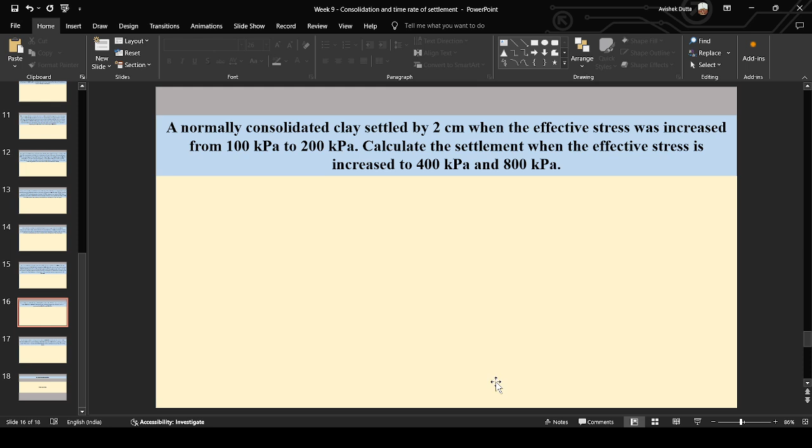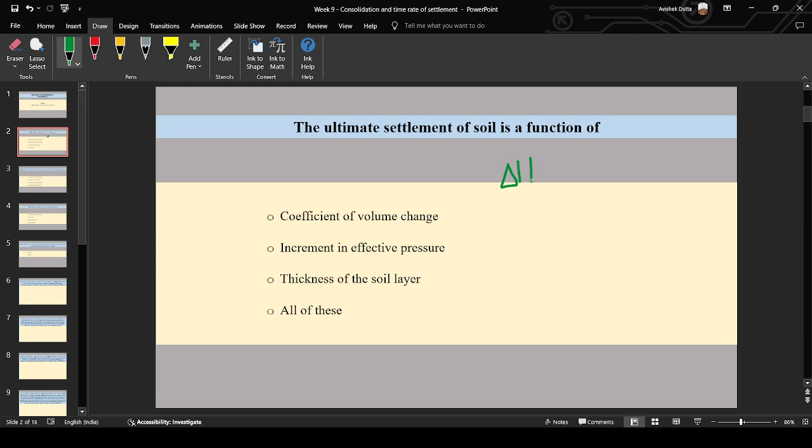So the first question was: the ultimate settlement of soil is a function of. Any answer? Okay, looks like some of you have left the meeting. I'll just straight away discuss the solutions. Ultimate settlement of soil is a function of the formula for ultimate settlement. If del H F means the final settlement, the formula is the product of MV, the coefficient of volume change, then increment in effective pressure, and the initial thickness of the soil layer. So it is a function of all these three: coefficient of volume change, increment in effective pressure, and thickness of the soil layer. So the fourth option, all of these, is the right option.

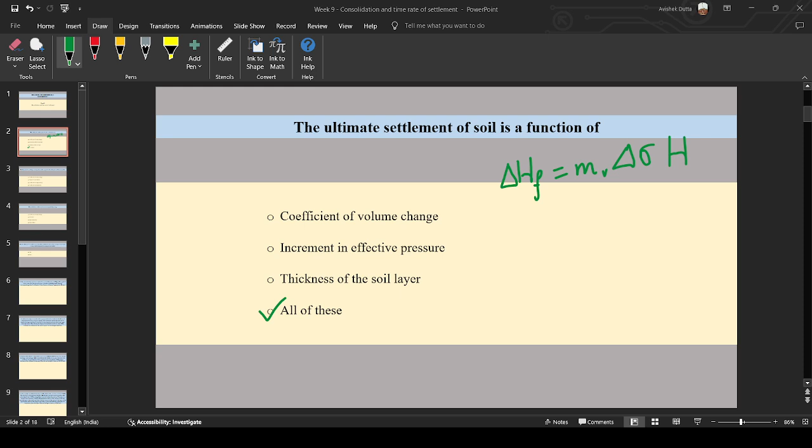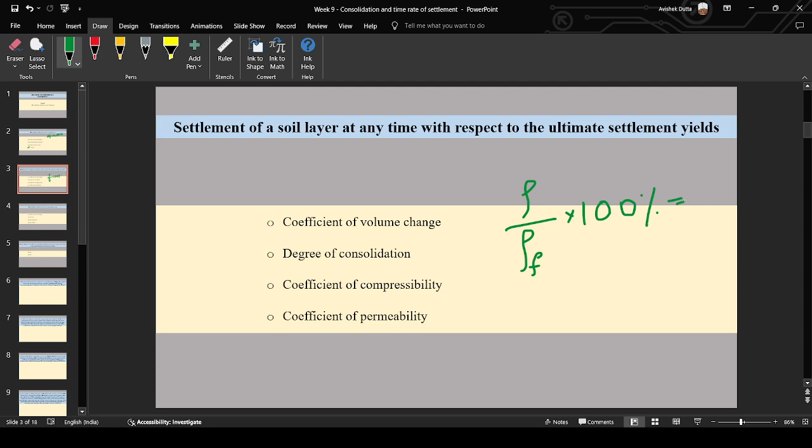Next question. Settlement of a soil layer at any time with respect to the ultimate settlement yields what? If settlement is rho, and ultimate settlement is rho f, and we describe this as a percentage, then this value we get is U, the degree of consolidation. So settlement of a soil layer with respect to the ultimate settlement gives us the degree of consolidation U. So the second option is the right option, it is the degree of consolidation.

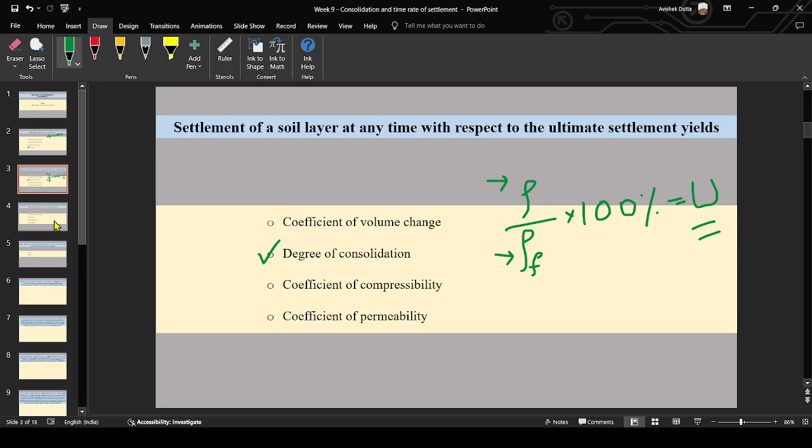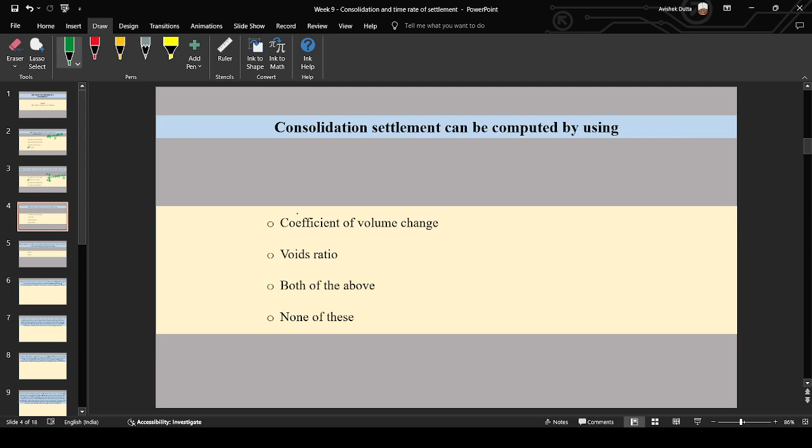Next question. Consolidation settlement can be computed by using what? It can be computed by using both, as I said in the first question. Ultimate settlement is a function of the coefficient of volume change. The coefficient of volume change is related to the change in thickness, or the settlement, divided by the thickness, which equals the change in void ratio divided by 1 plus the initial void ratio. So it depends upon both of these parameters. Consolidation settlement can be computed using coefficient of volume change and void ratio. So both of the above is the correct answer.

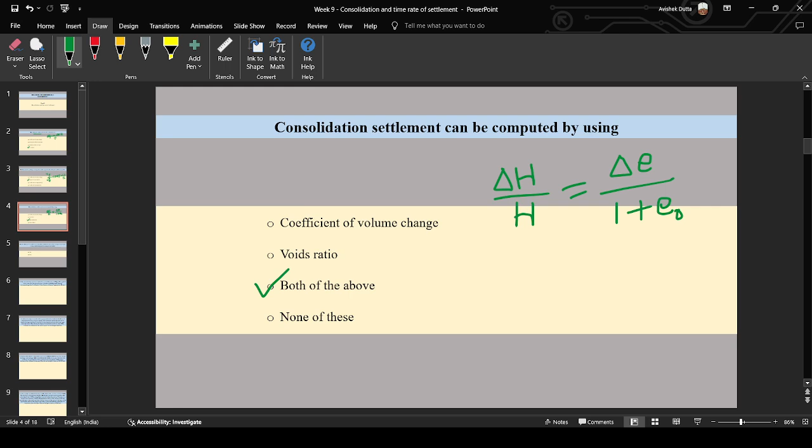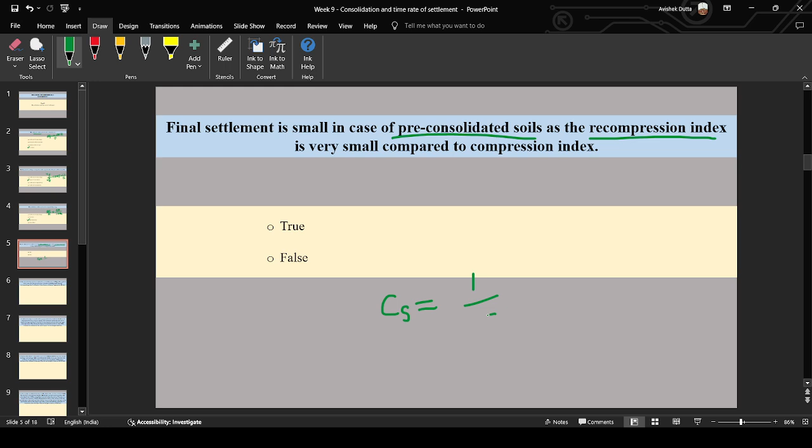Next question. Final settlement is very small in the case of pre-consolidated soils. For pre-consolidated soils, we have the recompression index or swelling index, which is approximately 1/5 to 1/10 of the value of the compression index. Since this is very less, and we know the settlement del H is directly proportional to the compression index Cc or swelling index Cs, if Cs is low compared to Cc, then the settlement in pre-consolidated soils will be very small, primarily because the recompression index or swelling index is lower than the compression index. So this is a true statement: final settlement is small in pre-consolidated soils as the recompression index is very small compared to the compression index.

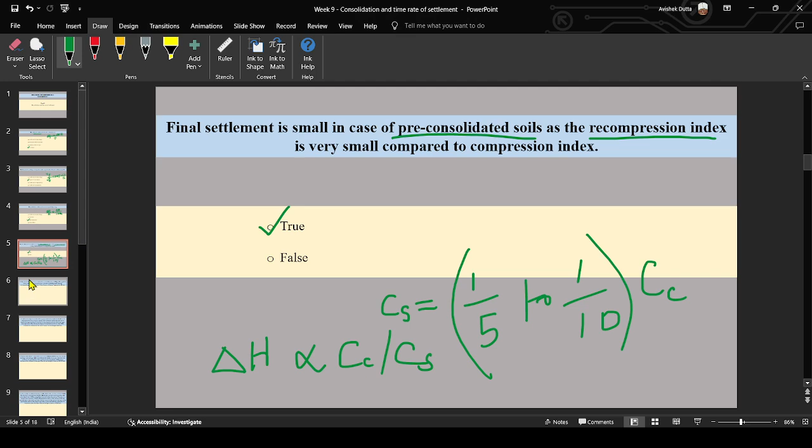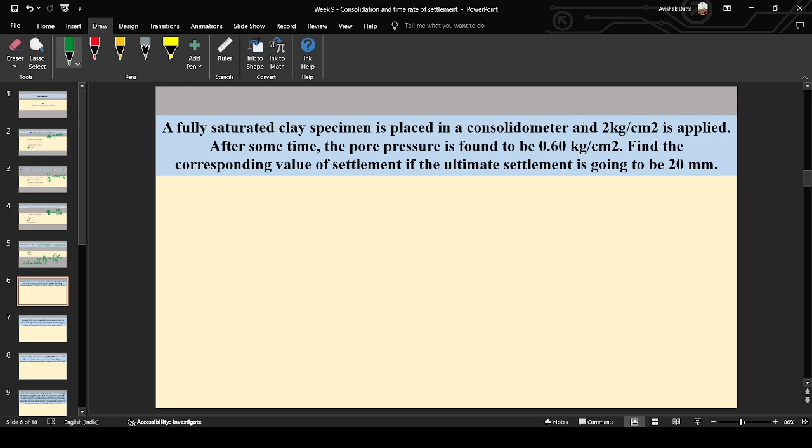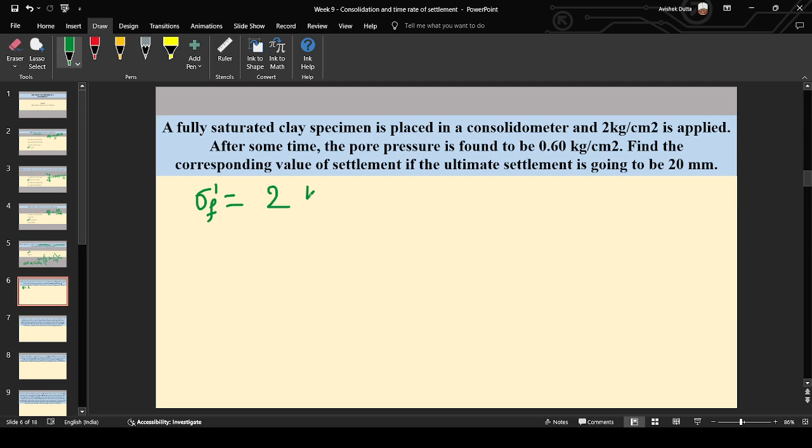Next question. A fully saturated clay specimen is placed in a consolidometer and 2 kg per centimeter square is applied. After some time, the pore pressure is found to be 0.6 kg per centimeter square. Find the corresponding value of settlement; the ultimate settlement is 20 millimeter. Now, if the pressure applied is 2, then for final settlement there will be no pore pressure, so the effective pressure will be 2 minus 0, that is equal to 2 kg per centimeter square. At any time t, if the pore pressure is 0.6, the effective pressure is 2 minus 0.6, that equals 1.4 kg per centimeter square.

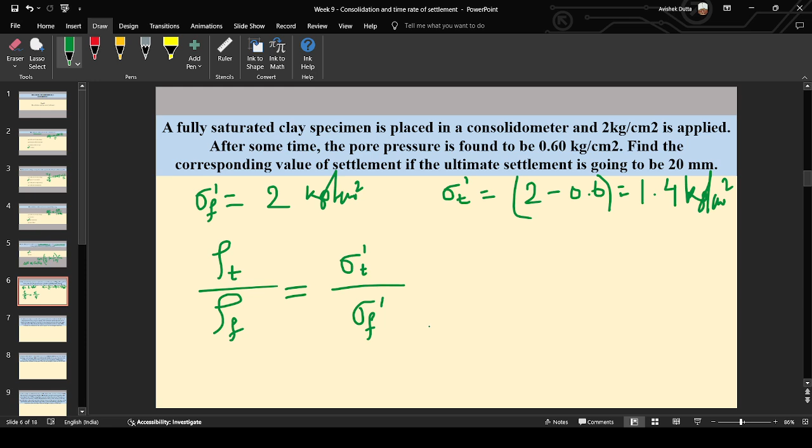Now, the settlement at any time t with respect to the final settlement is also the ratio between the effective stress at that particular time t with respect to the final value of effective stress. A similar sum was done in the previous class on Monday. So now we need to find the settlement at time t, when the pore pressure is 0.6. So rho t equals rho f into sigma t by sigma f. Rho f is 20, sigma t is 1.4, divided by sigma f which is 2. That will give us 14 millimeter.

14 millimeter. Degree of consolidation or effective stress is also the ratio of effective stress at time t to the final effective stress when pore pressure is 0. Equating those two, we can find the settlement at any particular time t when the pore pressure is given. Here the given pore pressure is 0.6, so we found the settlement at the time when the pore pressure is 0.6, which equals 14 millimeter. I hope the sum was clear, the solution is clear.

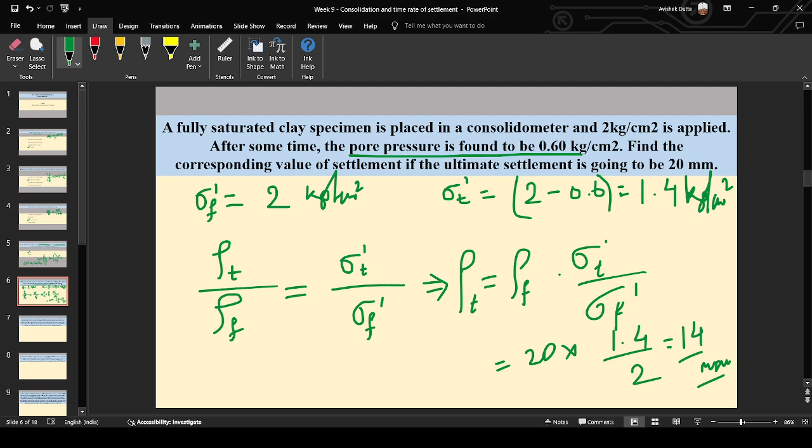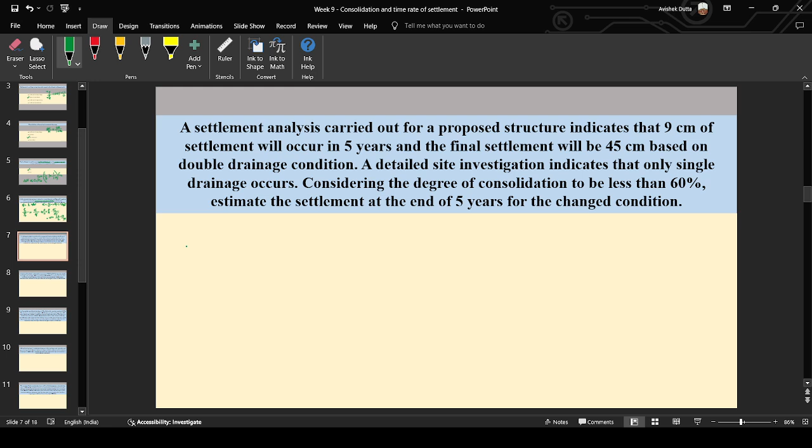In this question, first we need to find the degree of consolidation calculated or estimated from the assumption that there is double drainage. So rho is 9, rho f is 45, so we get a value of 20%, for which this is 20 percentage.

We know TV for 20% equals time factor, CV into T divided by, for double drainage here it will be H by 2 whole square.

Now how do we calculate the next part, that is single drainage? For this we'll find out the value of CV by H square. T we have as 5 years, and TV, how will you find TV?

TV equals pi by 4. That is the equation, let me write down the actual equation: pi by 4 into U square, where U in percentage is 20 percentage. I'll solve this to find the value of CV by H square, which is 20%. So 20 by 100, U by 100 whole square as a fraction, so 0.2, U is 0.2, into pi divided by 4.

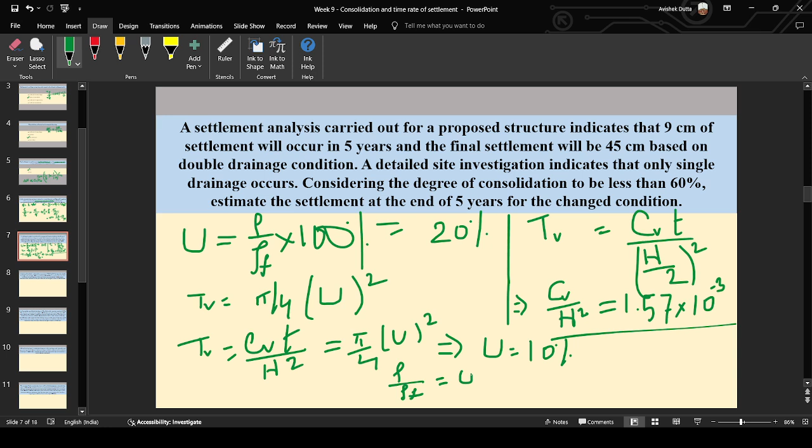From here we see that rho by rho F equals 10 by 100, that is 0.1, or rho equals, for single drainage using CVT by H square, rho equals 0.1 into rho F. What is rho F? Rho F is 45 centimeter. So this will give us a value of 4.5 centimeter.

So first find the value of degree of consolidation. Next find the value of CV by H square using the time factor formula for double drainage. Put the same thing for single drainage and equate that with pi by 4 U square, the basic formula of TV and U. You get the modified corrected value of degree of consolidation as 10 percentage. Using that and the final settlement of 45 centimeter, find the actual settlement after 5 years. I hope the sum was clear.

I'll go to the next question.

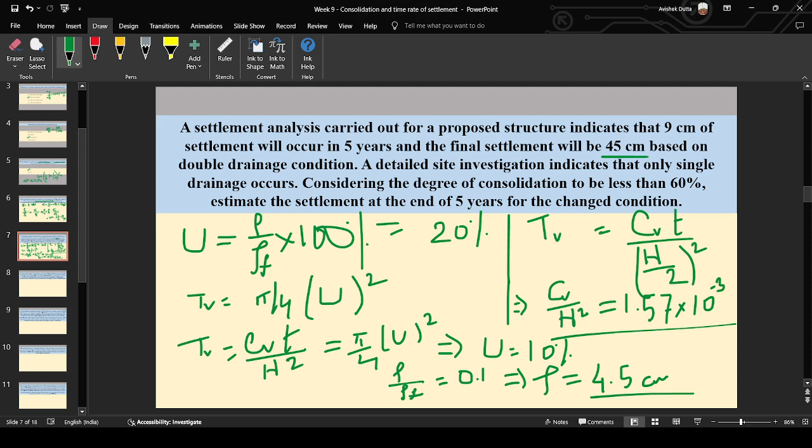A clay layer 8 meter thick subject to the pressure of... here we have many parameters given. Determine the coefficient of consolidation, that is CV. So again here it has been mentioned double drainage.

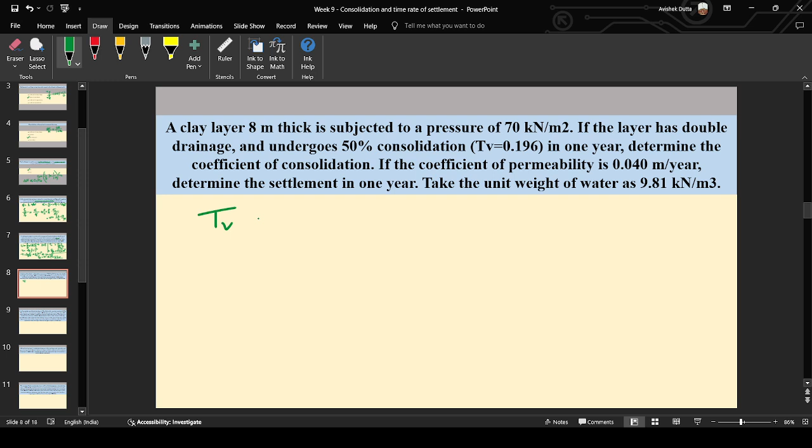So we know time factor TV equals CV T by H by 2 whole square. From here we get the value of CV, time factor is 0.196, time is 1 year, and H is 8, so H by 2 whole square. Putting all the values, we get the value of CV as 3.136 meter square per year. This is the value of the coefficient of consolidation.

Now find the settlement in 1 year. It has been said that 50% consolidation occurs in 1 year.

Let us use the coefficient to find the value of MV, because if we find out the ultimate settlement, we can half it to find the 50% consolidation. So, MV, how to find out the coefficient of volume change?

The formula is K divided by CV gamma W. Now K is given as 0.04, CV is obtained as 3.136, and gamma W is taken as 9.81. Putting all values, we get MV as 1.3 into 10 to the power minus 3 meter square per kilonewton. This is the value of MV.

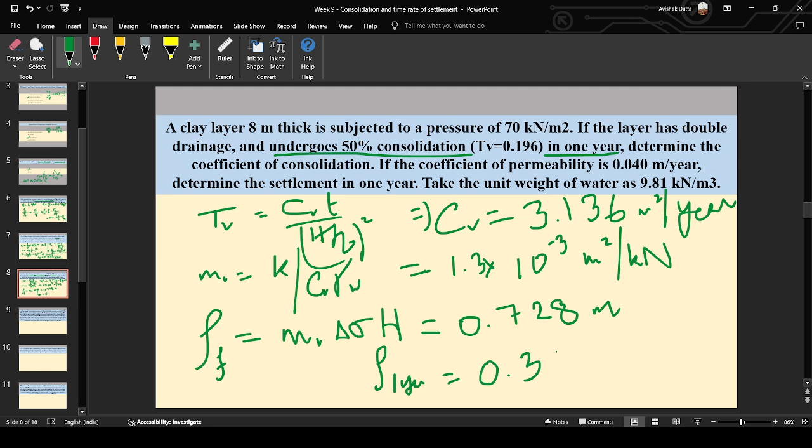Now it has been said that it undergoes 50% consolidation in 1 year, that means half of the settlement is occurring in 1 year. So rho in 1 year will be half of 0.728, that is 0.364 meter. 0.364 meter is the answer.

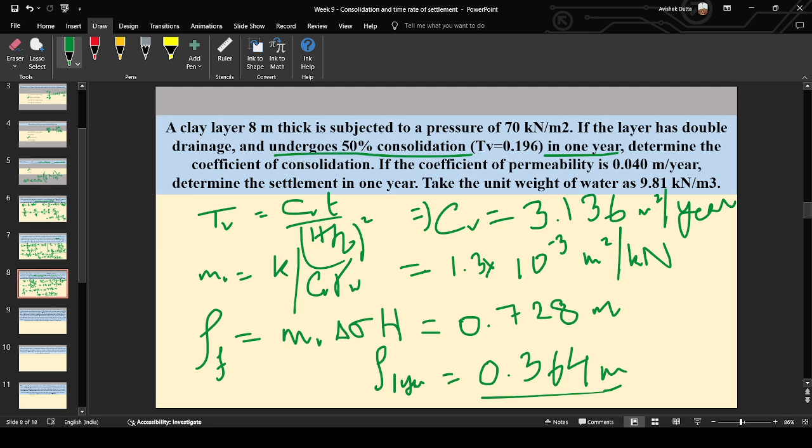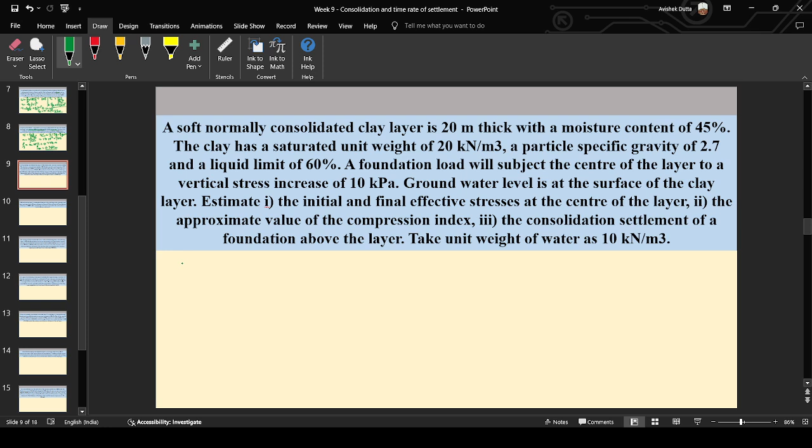Here in this question you are first told to find the initial and final effective stress. For the initial effective stress, we know that initial effective stress equals to gamma submerged into H. What is gamma submerged? Gamma sat minus gamma W.

Gamma sat is 20 and gamma W is 10, into H. What is H? 10. So it gives us the value of 100 kilonewton per meter square. What is the final?

Initial plus change. What is the change in effective pressure? It is 10 kilopascal, del sigma dash equals to 10 kilopascal. So now sigma dash equals to 110 kilopascal, or kilonewton per meter square, whatever you can write.

Okay, so the first part is over. The second part is the value of the compression index.

So we have the formula Cc equal to 0.009 into liquid limit minus 10. Liquid limit is 60%, 60 minus 10 equals to 50, and the value is 0.45. 0.45 is the value of the compression index.

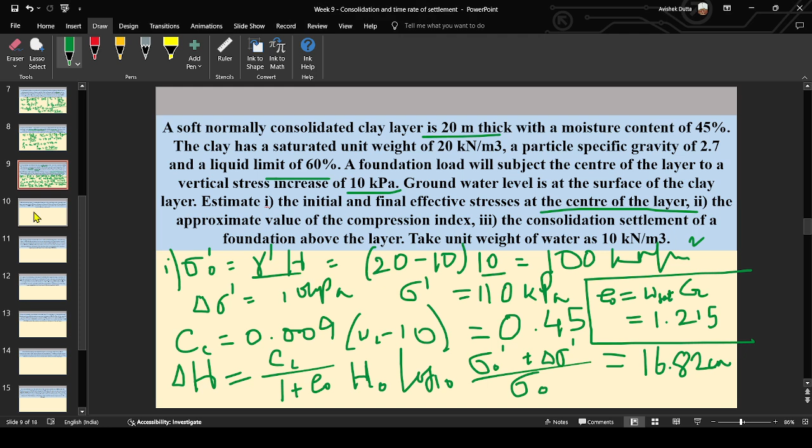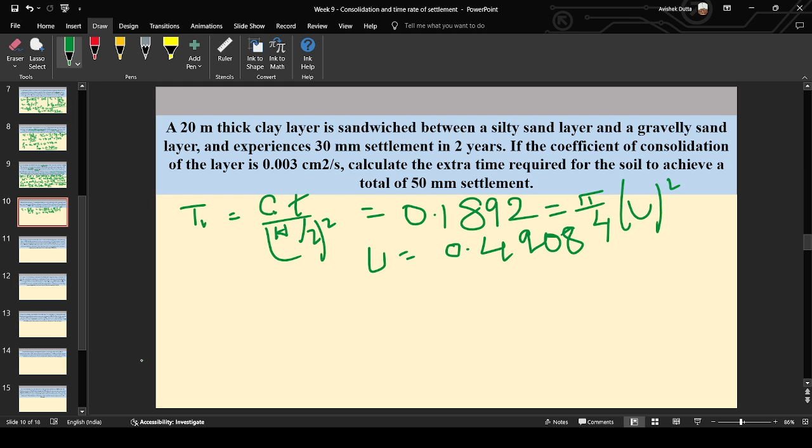Now the settlement, this is in 2 years. So if u equals to settlement by ultimate settlement, then we get the ultimate settlement to be as settlement by u, that is 30 is the settlement in this case in 2 years, divided by the obtained value of u. What do we get? We get a value of 61.12 millimeter.

61.12 millimeter. Now, if this is rho f, then for 50 mm settlement, for rho equals to 50, what is the value of u then? 50 divided by 61.12, and that gives a u of approximately 81.8 percentage. Obviously, this will be into 100.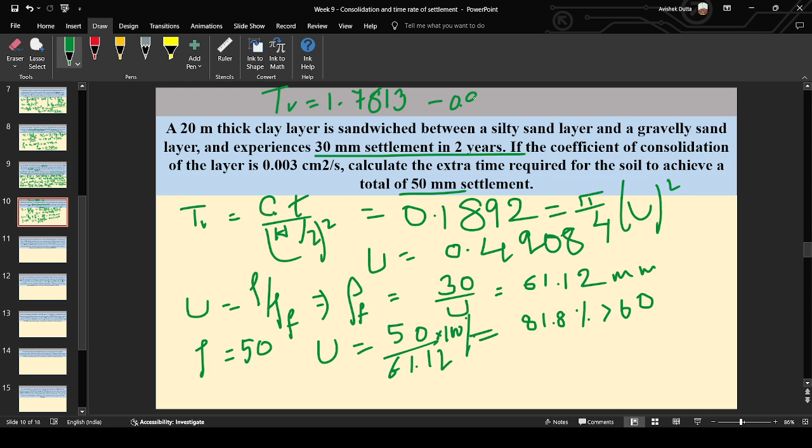Now, for value of u more than 60, we use a formula that is in the above. Tv equals to 1.7813 minus 0.9332 log to the base 10 of 100 minus u. So using this formula, we get the value of Tv, the new value of Tv for 50 mm settlement to be equal to 0.6054.

Now rearranging the first formula to find the value of T. T equals to time factor into H by 2 whole square divided by CV. We get a time of approximately 6.4 years.

6.4 years. Now it has been said calculate the extra time required. So after 2 years, how much time will be required? Del T equals 6.4 minus 2, that is 4.4 years. 4.4 years will be required for the soil to achieve a total of 50 mm settlement. I hope this was clear. Next question.

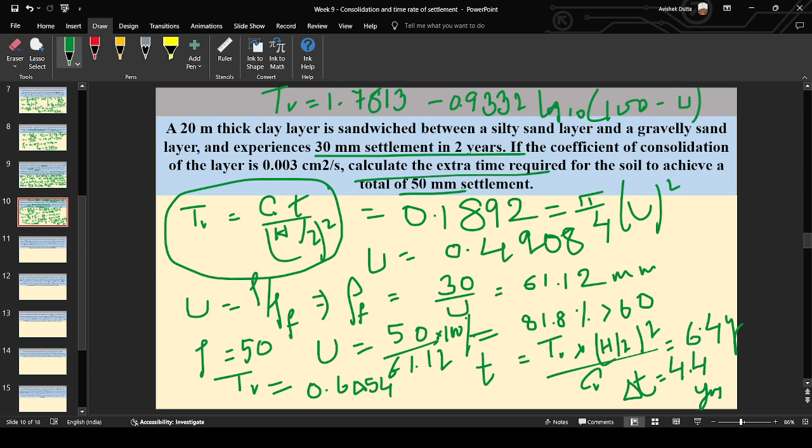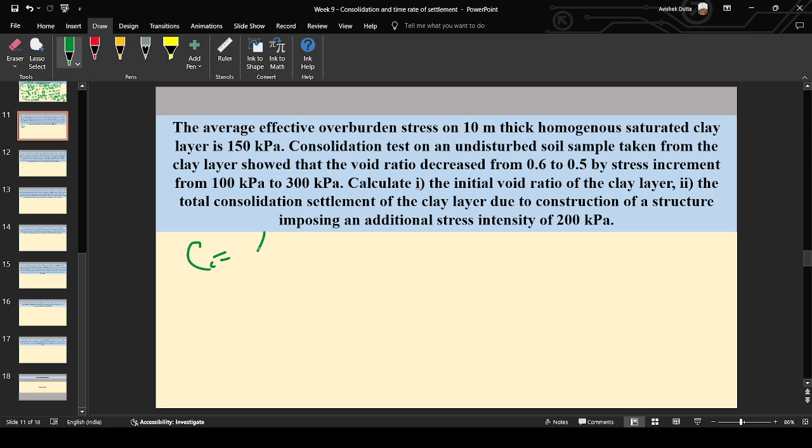In this sum, we are going to find out at first the initial void ratio. For that, we'll first of all find out the compression index. Cc equals to del E divided by log to the base 10 sigma 2 by sigma 1. What is del E? Change in void ratio, 0.6 minus 0.5 is 0.1. Log to the base 10: sigma 2 is 300, sigma 1 is 100. Putting all the values, we get a value of compression index of 0.21.

Now for the next case, in this value, I'll just write it over here. This is again equals to del E. Okay, del E. Now the initial overburden stress, average overburden stress is 150.

Yes, so it has been said. I'll just write it to make you understand fully. It has been said that this is the value of P, this is the value of sigma. So when the value of sigma is 150, this is the average overburden stress, then the value of E is equals to E0. Now for 100 we know that it was equal to 0.6.

So Cc is also equal to this formula, where we can write it like this. For E0 it will obviously be less than 0.6. So, 0.6 minus E0 divided by log to the base 10. What is del sigma 2 over here? This is del E. Del sigma 2 is how much? This is 150, right? 150 by 100.

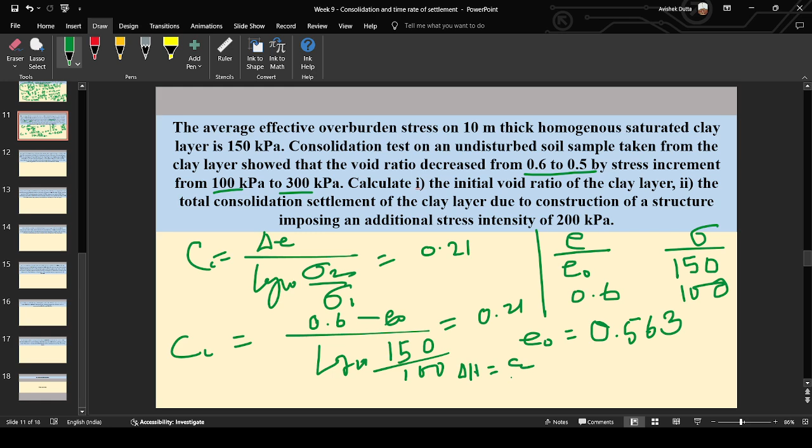0.563. Okay, now the consolidation settlement, again the same formula which we have used in the previous sum: Del H equals to Cc by 1 plus E0, into H, original height, log to the base 10.

Sigma 2 final by sigma 1. Now sigma 2 over here is equal to 150 plus additional stress intensity of 200 kilopascal, that is 350, and sigma 1, let's call it sigma 1 dash, is equal to 150 initial. So putting all these values, we get the value of del H as approximately equivalent to 0.5 meter.

0.5 meter. So first of all, using the value of compression index, we find the initial void ratio of the soil, and then using the compression index and initial void ratio, with the formula Cc by 1 plus E0, H, log to the base 10 sigma 2 by sigma 1, we find the value of the consolidation settlement.

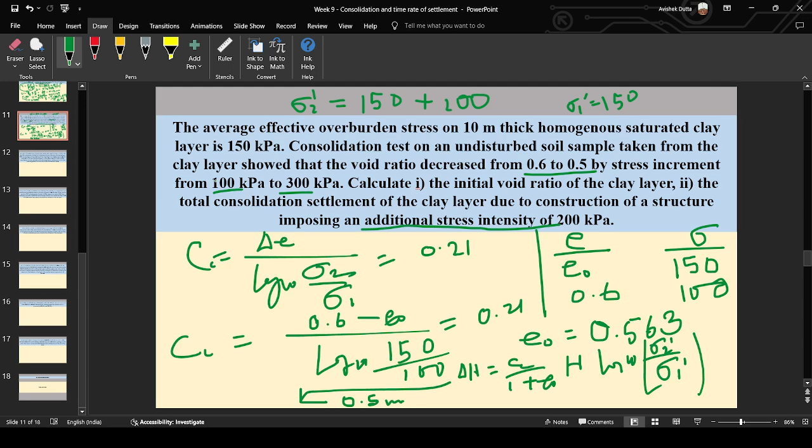Okay, next question. Now here it has been said 50% consolidation in this sum, this is constant, 50% consolidation. So for the same, for u equals to constant,

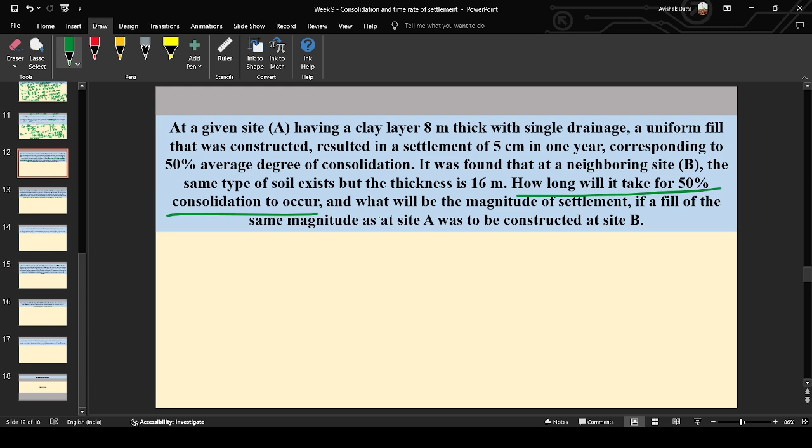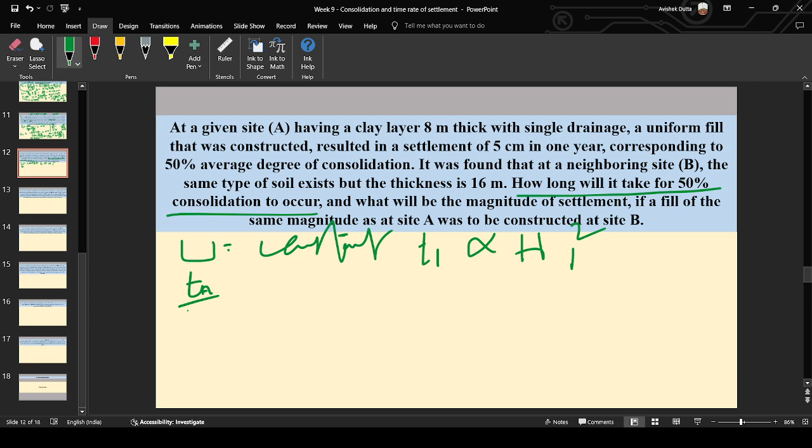we know from the formula that time taken is directly proportional to the square of the thickness. That is T1 by T2 equals to H1 by H2 whole square. Now we know the value of T1, or we can write it as TA by TB is equals to HA divided by HB whole square. We are told to find out the value of TB.

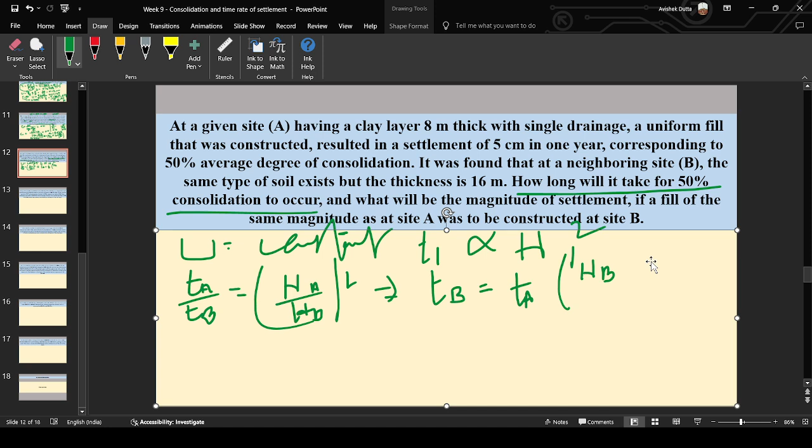How long will it take for the consolidation to occur at site B? TB equals to TA into HB divided by HA whole square, that is HB by HA whole square. HB is 16, HA is 8, so that's 4. TA is 1 year, so 4 into 1 becomes 4 years.

TB is 4 years. It will take 4 years to attain 50% consolidation. And now the settlement: we know del H is equal to MV into del sigma into H0, so we can write it like this.

Also in this case, if del H equals to rho, let del HA divided by del HB, this is equal to HA divided by HB, because it is directly proportional to the thickness of the soil. Now we have to find out del HB.

Del HB will be equal to del HA, that is the settlement at A, into HB by HA, so it will be equals to HB by HA. Okay, am I audible?

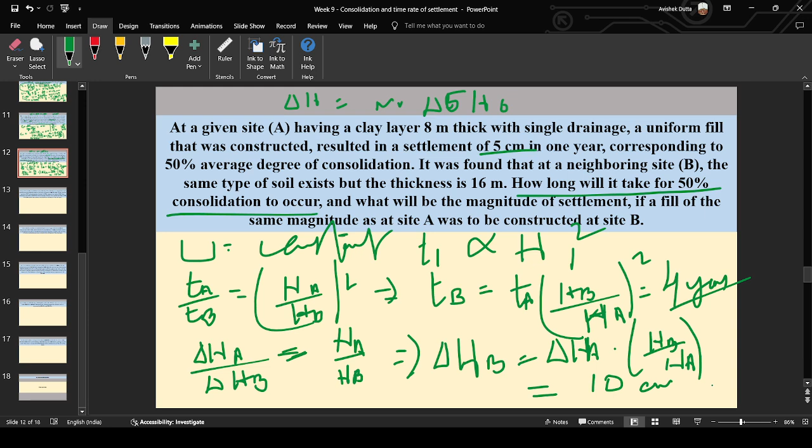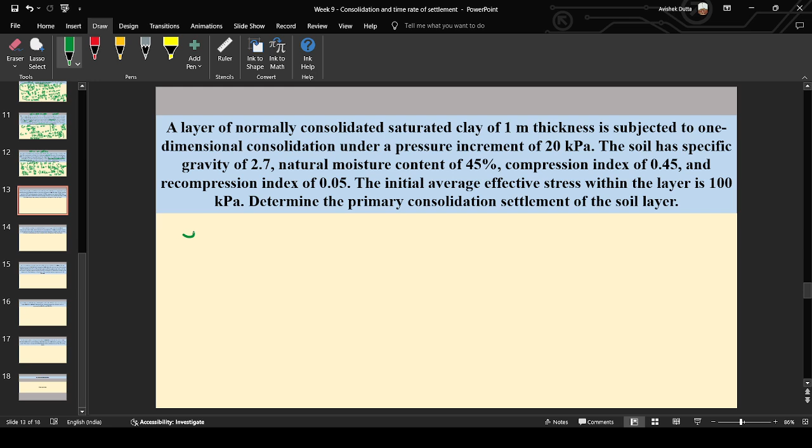Okay, next question: primary consolidation settlement. In this case, first of all, we don't have the value of void ratio, so for that, initial void ratio equals to Wg divided by S, so in saturated soil S equals to 1. The moisture content is 45%, G is 2.7, so we again get E0 equals to 1.215.

E0 equals to 1.215. Now we have the value of Cc given over here.

Cc is given over here. So what are we asked? The layer of soil specific gravity, and the initial average effective stress is given. We need the primary consolidation settlement.

So the formula is del H consolidation settlement equals to Cc by 1 plus E0, H, log to the base 10 of sigma initial plus del sigma divided by sigma initial, or sigma final by sigma initial.

So the initial stress is 100. The increment in stress is 20. So it will be over here 120 by 100. The height is 1 meter.

The value of Cc, what is the value of Cc? The compression index is 0.45. It is not being said over here whether it is a remolded soil or pre-consolidated soil, so this recompression index will not be of any use. We will only be using the compression index.

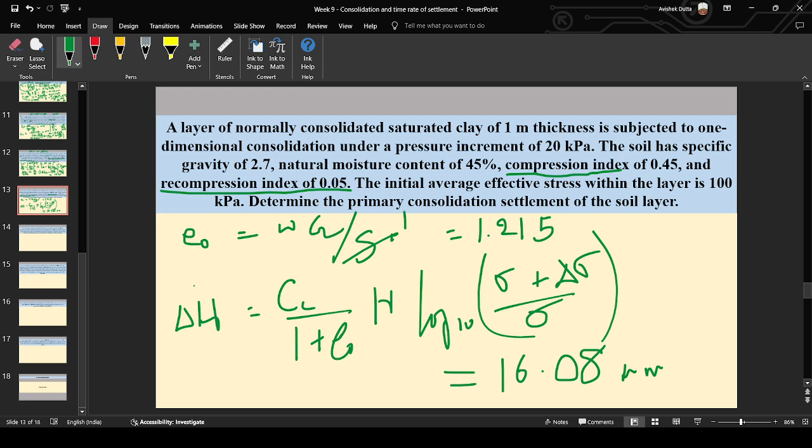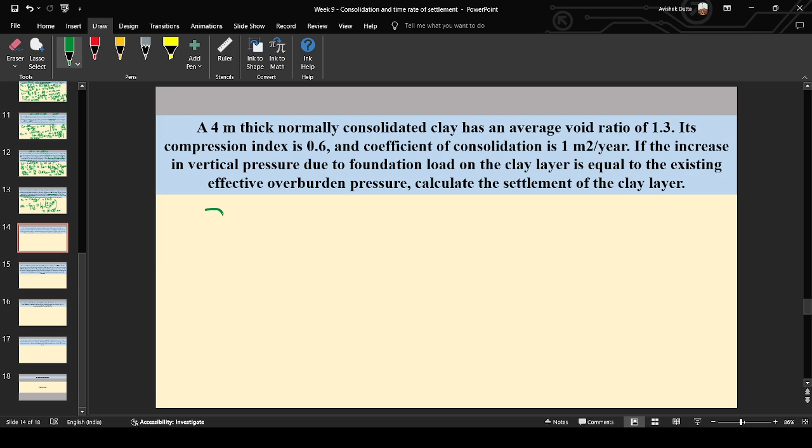So if the initial it is sigma, del sigma increase in vertical pressure due to foundation load is equal to the existing overburden pressure. So del sigma equal to sigma over here.

Now the value of settlement we know: Cc given as 0.6, by 1 plus E0. E0 is given as 1.3, into H 4 meter, log to the base 10 of sigma plus del sigma divided by sigma. Now del sigma equal to sigma.

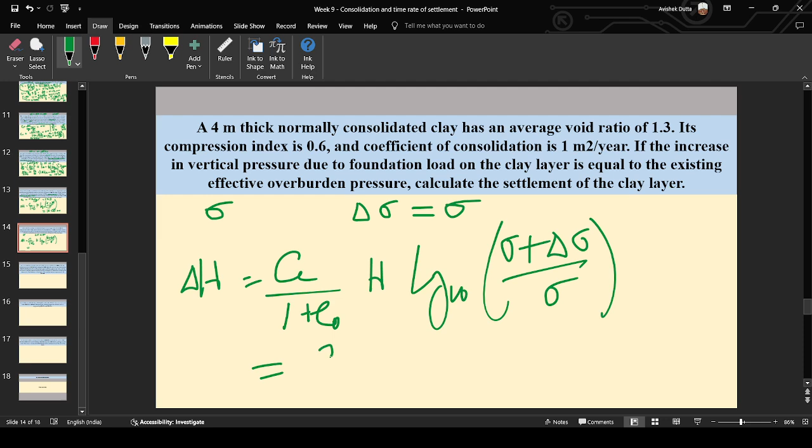So this becomes 2 sigma by sigma, that is 2 log 2. And now putting all the values, Cc equal to 0.6, E0 equals to 1.3, height is 4, del sigma equal to sigma, we get a value of approximately 314 millimeter.

So this is a simple question. The only trick is that the increase in overburden pressure is equal to the existing overburden pressure. The value of coefficient of consolidation is also of no use here. Got it? Next question.

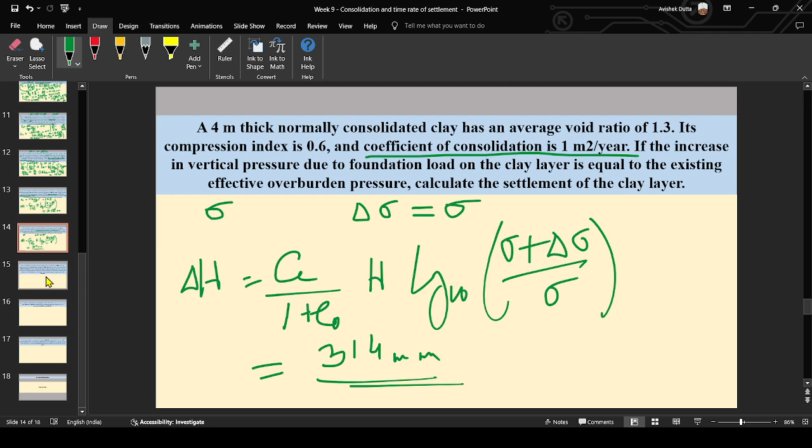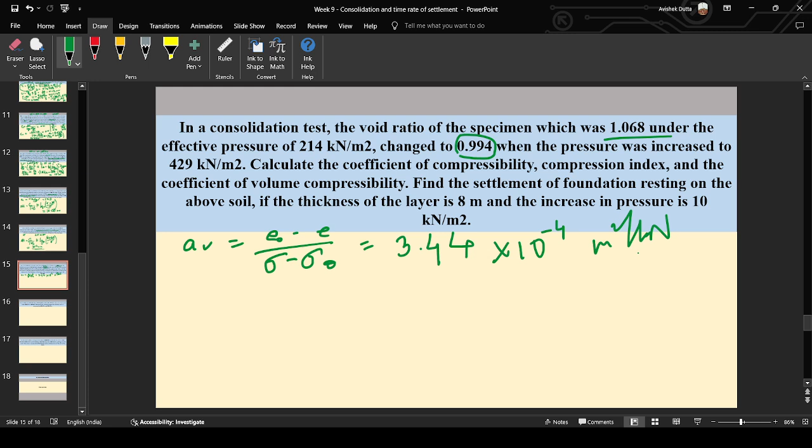E0 is 1.068, E is 0.994, sigma 0 is 214 and sigma equals to 429. Putting all the values, we get the value of AV to be approximately equal to 3.44 into 10 to the power minus 4. The unit is meter square per kilonewton.

Okay, this is the first part. The second part is the compression index, Cc, equal to del E divided by log to the base 10 of final pressure divided by initial pressure.

Now del E is again E0 minus E, and sigma is 429, sigma 0 is 214. We get a value of approximately 0.245.

Okay. Next is the coefficient of volume compressibility, MV.

MV equals to coefficient of compressibility AV divided by 1 plus E0. Now AV equals to 3.44 into 10 to the power minus 4, E0 equal to 1.068. We get a value of 1.664 approximately into 10 to the power minus 4 meter square per kilonewton.

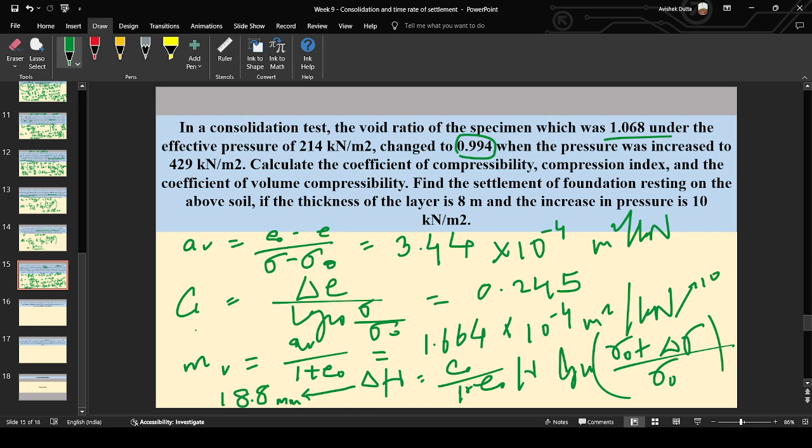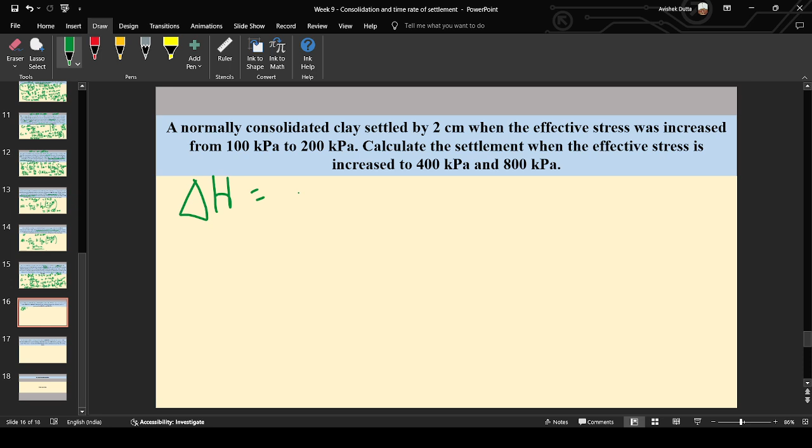We again write the basic formula: del H equals Cc divided by 1 plus E0, into H, into log to the base 10 of sigma final by sigma initial.

Now we see that the height is not given, the value of Cc is not given, and the value of E0 is not given. So we will take this entire thing as K.

We will write this formula as K into log to the base 10 of sigma final divided by sigma initial. Now what is the value of K? For sigma final 200, sigma initial 100, and del H settlement as 2 centimeters, the value of K will be obtained like this.

K equals del H divided by log to the base 10 of 200 by 100. That gives a value of approximately 6.644.

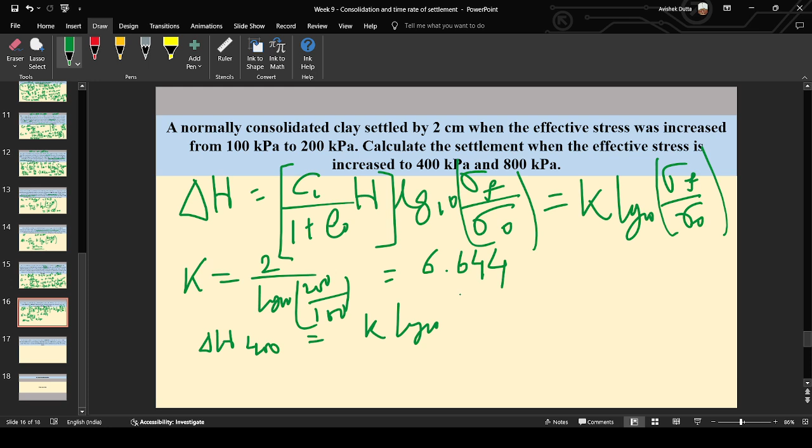Now for the first case, when the pressure has been increased to 400, del H 400: we write K into log to the base 10 of 400 divided by the initial 100. The value of K we know, and we get a value of approximately 4 centimeters.

Again for the next one, del H 800, we write it as K into log to the base 10, final 800, initial 100. We get a value of approximately 6 centimeters. Let me just solve one of these parts: log of 8 into 6.64 gives 6 centimeters.

So the value of K has been obtained in centimeters only, and we get all the other values in centimeters by putting that value of K with the corresponding final pressures. I hope this was clear. Next question.

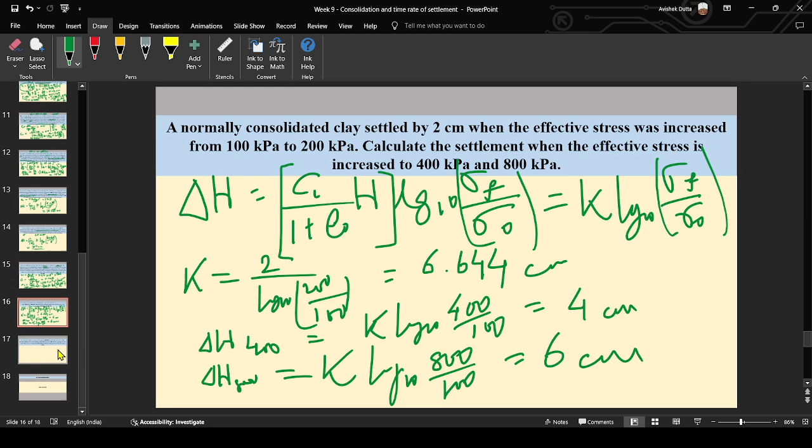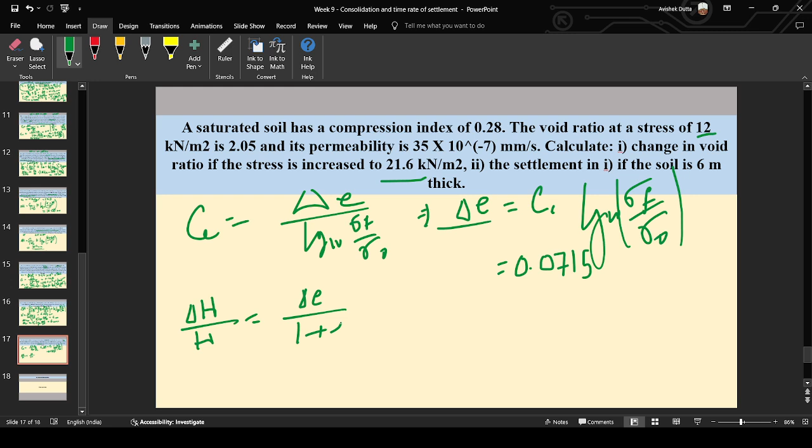Now we have to find the settlement for this case. We know that settlement del h divided by original height equals change in void ratio divided by 1 plus original void ratio. From this, del h equals original thickness into change in void ratio divided by 1 plus initial void ratio.

Initial void ratio is given as 2.05, with initial stress of 12 kilonewton per meter square considered as the initial one. We put everything in this formula: H is 6, del E is 0.0715, and E0 is 2.05.

We get a value of 0.141 meters, since H is taken as 6 meters. So this is the settlement for the increment in stress to 21.6 kilonewton per meter square, for which the change in void ratio is 0.0715.

Let me just solve it once: 0.0715 into 6 divided by 3.05 gives 0.1406, approximately 0.141. I hope the solutions were clear.